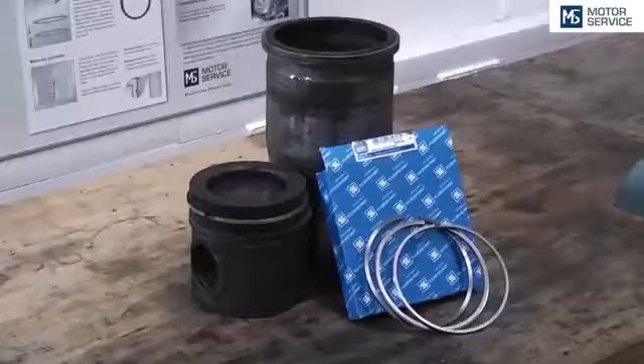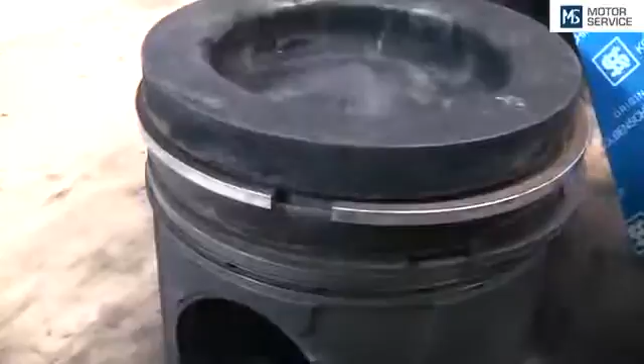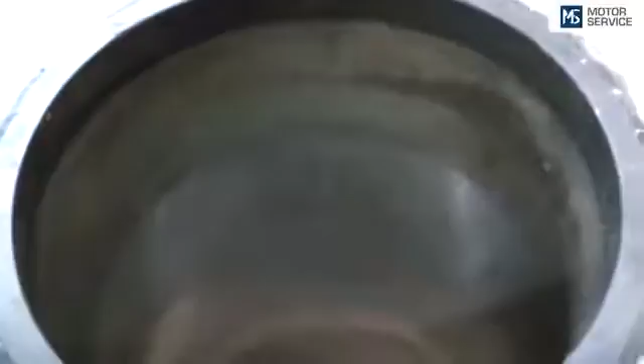The reuse of already run interacting sliding parts of piston rings, pistons and cylinder running surface should be done using common sense and expertise. The sealing system is only as effective as its weakest component. It is not practical or even sensible to attempt to recondition an engine by only changing the piston rings. Simply replacing the rings while reusing a worn piston or a worn cylinder liner will not yield the desired results.

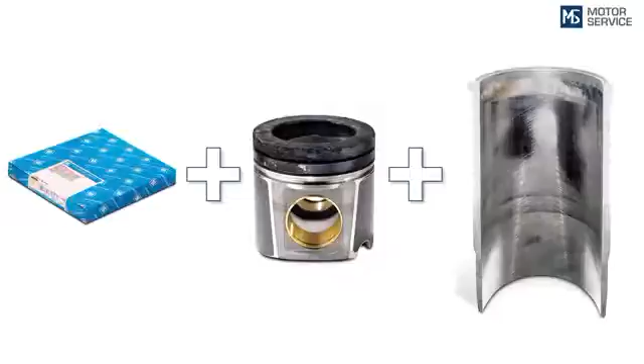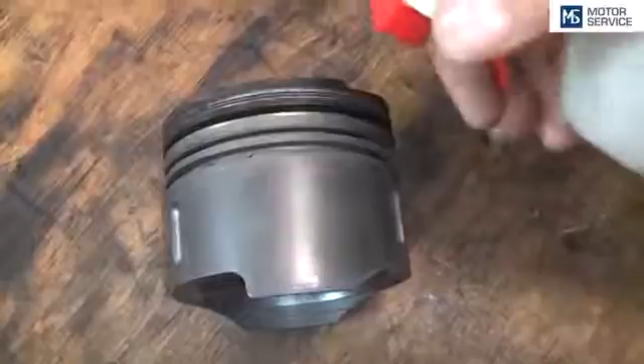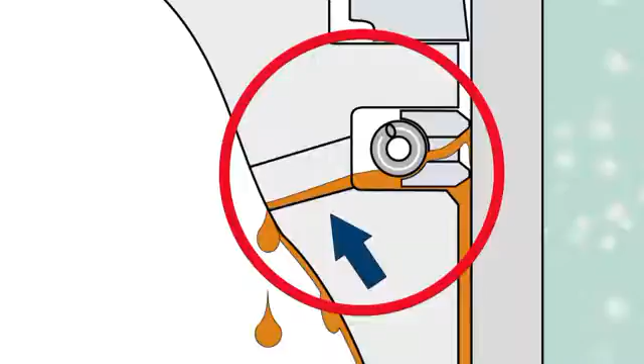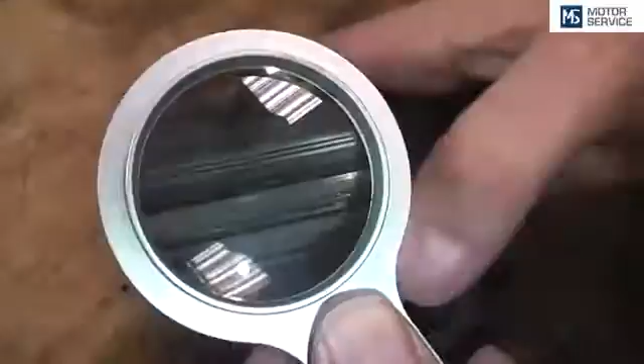Clean used pistons thoroughly from adhering dirt. Make sure that the ring grooves are free of carbon and dirt. Use a drill or another suitable tool to clean the oil-draining bores if necessary. An important check is the visual inspection of the ring grooves for wear, small scratches, dirt or unevenness causing a very fast abrasive wear of the new piston rings.

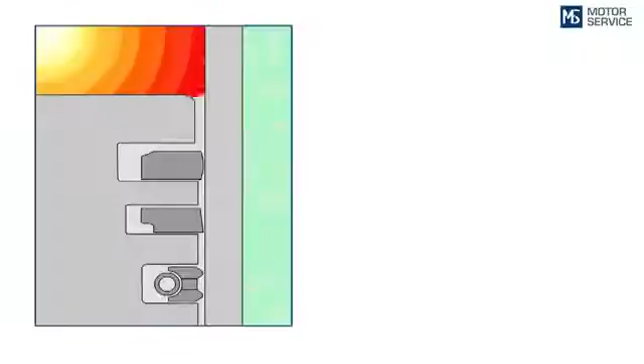Pay attention that no damage is caused to the groove sides when removing the carbon. The lower groove side is a sealing face. Damage due to scratches may cause high oil consumption or an increased blow-by gas emission during engine operation.

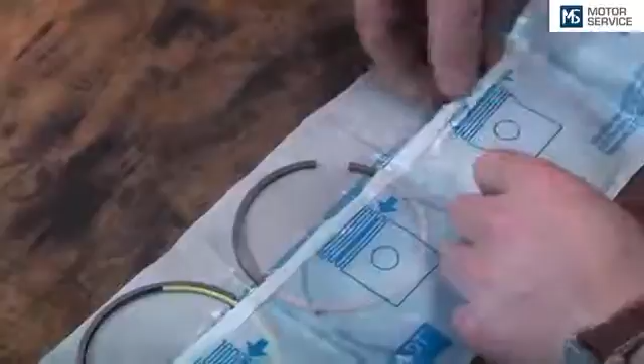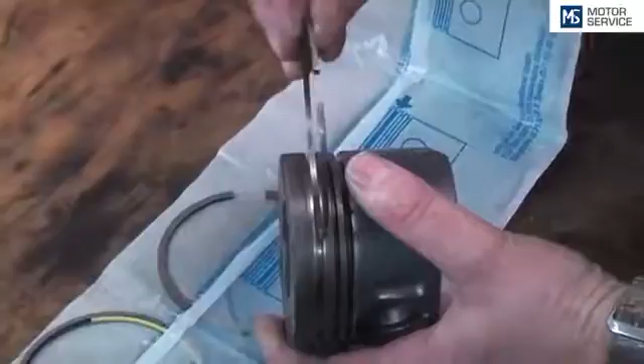Whenever new piston rings are to be fitted on used pistons, the ring height clearance will decide on whether the piston can be reused. The piston ring concerned is inserted into the cleaned ring groove and measured with a feeler gauge. The table shows up to which ring height clearance a piston can be reused.

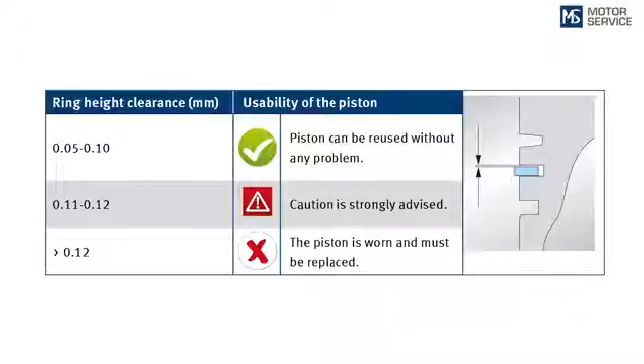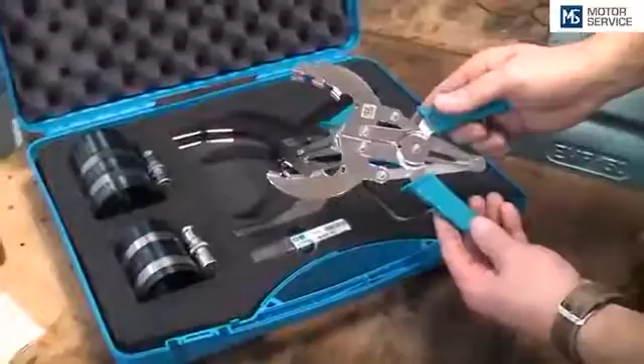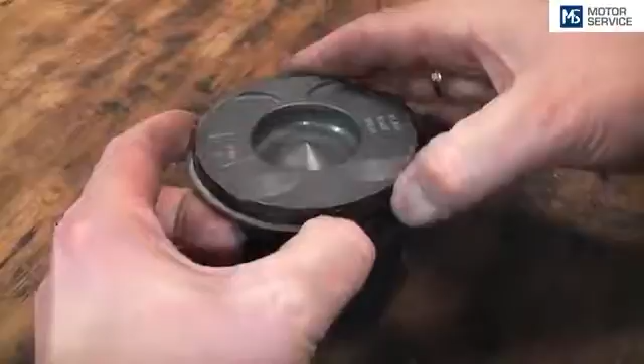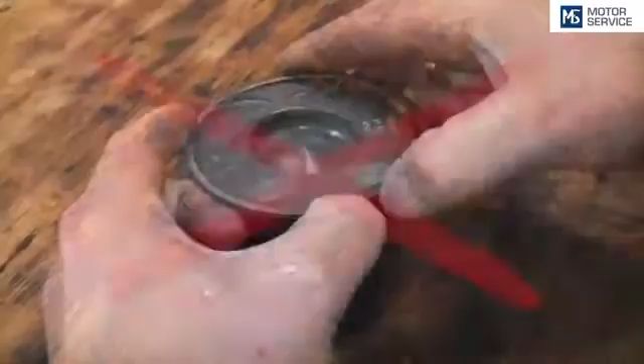Fitting of the piston rings. It is essential that piston ring pliers are used for fitting and removing piston rings. Attention! If the piston ring is fitted quickly by hand and without breaking, this may be evidence of the skills of the mechanic, but it will usually result in damage to the piston rings when they are fitted. Except for steel rail oil control rings, never fit the rings manually. Never twist a piston ring during the fitment.

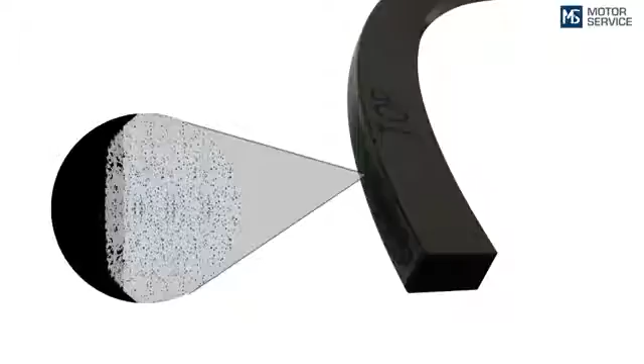If the ring is deformed and no longer lies flat in the groove, it can no longer rotate in it, wears on one side, or will no longer seal properly. Piston rings with molybdenum coating get small invisible fractures in the coating, a kind of pre-damage. Due to strong overexpansion, the molybdenum breaks out.

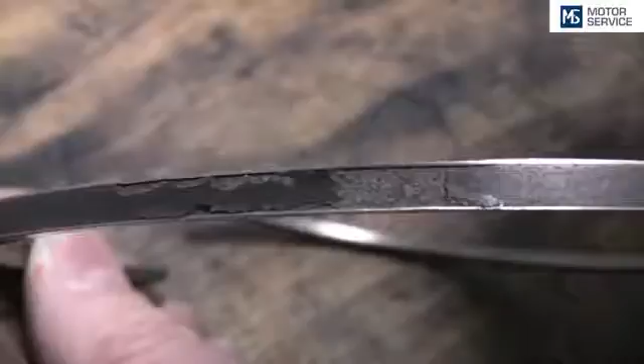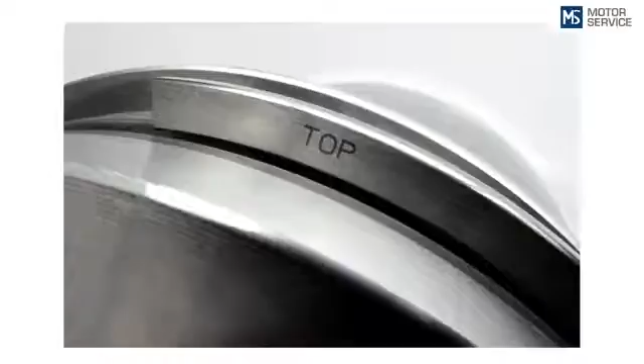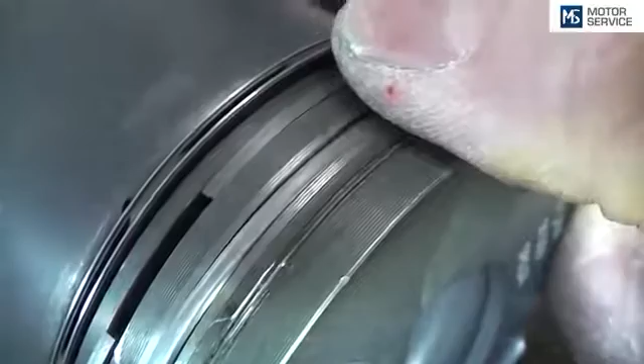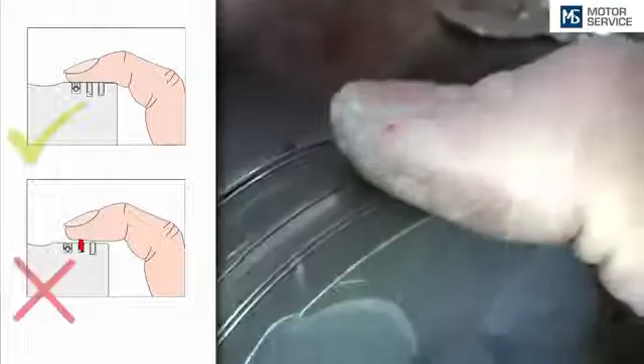Pay attention to the markings. Top means that this side must face the top, towards the combustion chamber. Check whether the rings can rotate freely in the ring grooves. Check whether the ring disappears completely in the ring groove along its entire circumference. For example, the sliding surface of the ring should not protrude over the piston skirt. This is essential since the ring function is not warranted if there is no groove base clearance, for example, due to an incorrect ring or a carbonized groove base.

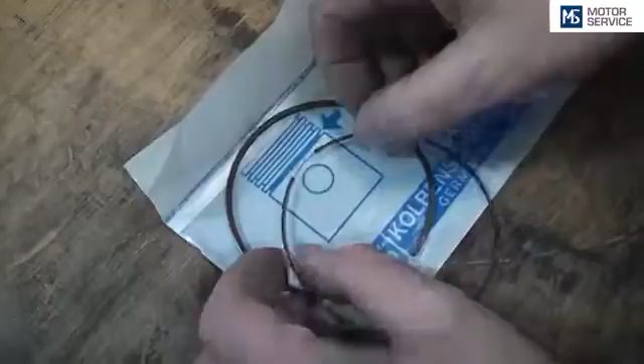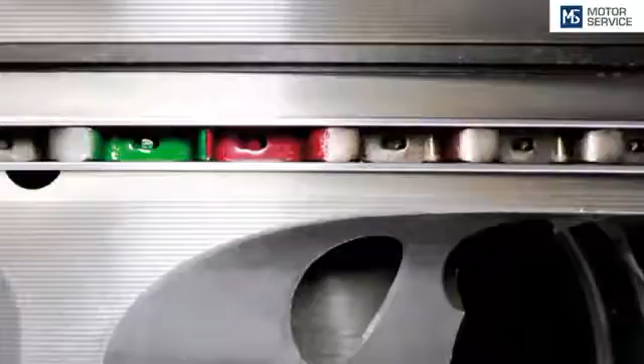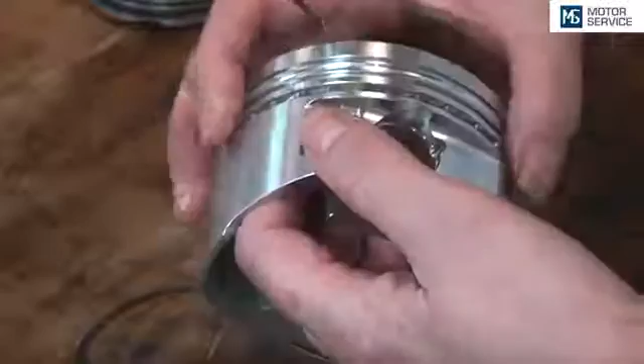Both color markings on the expander spring ends must be visible. If these are not visible, the spring is overlapping and the ring can consequently not function properly. All ring joints of the 3-piece oil control ring, the 2 steel rails and the expander spring must be mounted with an offset of 120 degrees to their counterparts.

Rotate the piston ring joints of the pre-assembled piston in such a way that the ring joints are approximately 120 degrees offset to each other. This helps the pistons and the rings during the first engine start. Offsetting the joint ends prevents too much blow-by gas from being produced during the first start of the engine, and therefore the engine starting poorly.